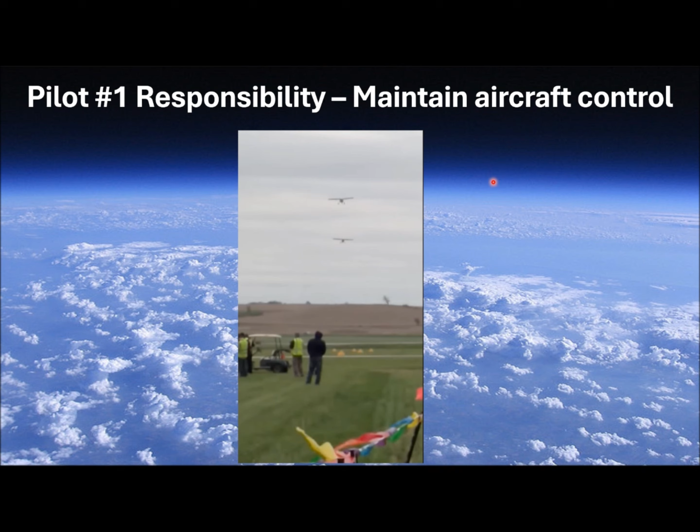What I'm going to discuss today is first give you some information about loss of control, which is by far the biggest cause of accidents and fatal accidents, not only in general aviation, but even in commercial aviation. Then talk about angle of attack, review what it is, and then talk more specifically about why it's important and better than airspeed to control flight in certain conditions.

Then talk about what kind of angle of attack systems are out there and how that information is displayed. And then the last half of the talk will be a bunch of short video clips that show angle of attack being used in the cockpit for a variety of flight situations.

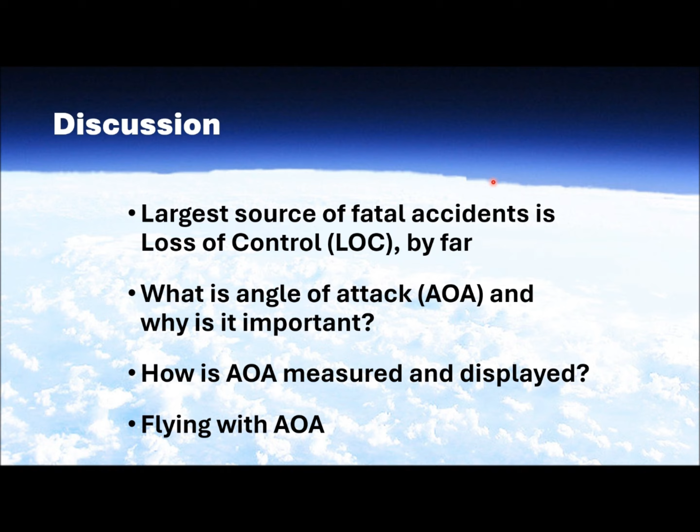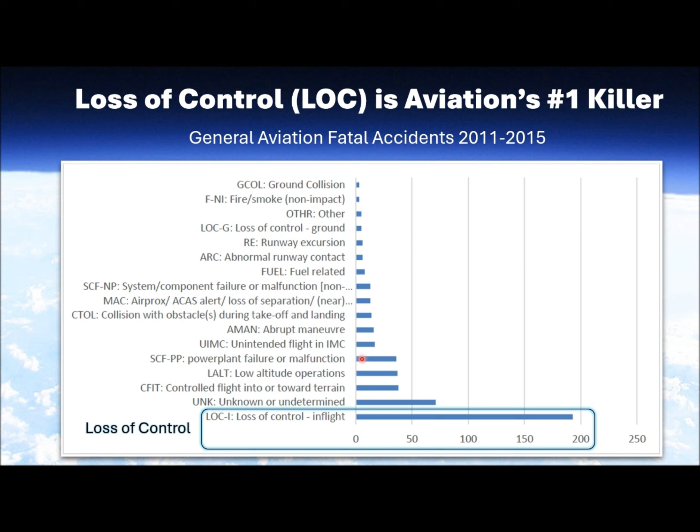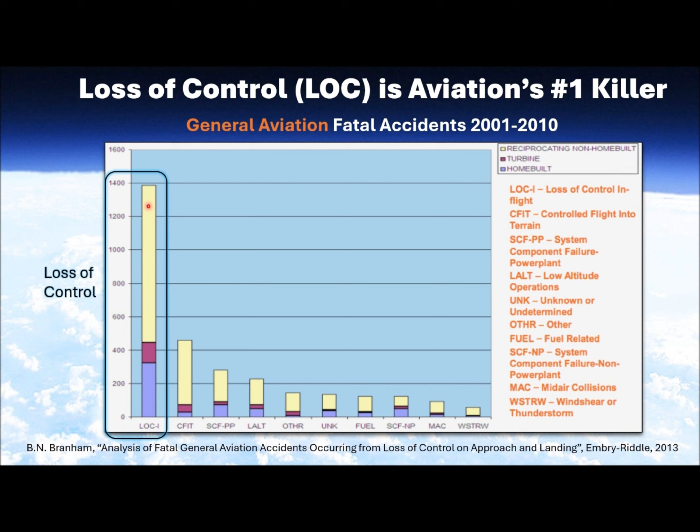Now here the plot is shown horizontally. The next plot shows similar data from a different source, plotted vertically instead of horizontally. There's a little bit more information. The yellow represents certified aircraft, the blue represents experimental aircraft, and the purple actually represents turbine aircraft. But the trend is the same: LOCI, loss of control, is by far the largest single reason for general aviation fatal accidents.

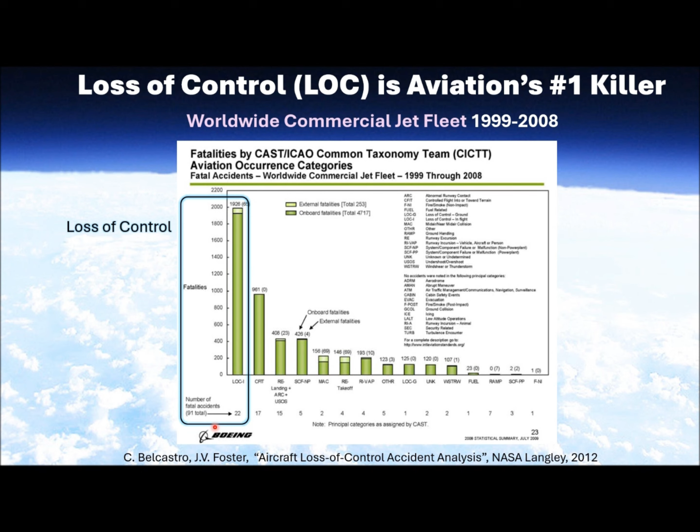Now, because loss of control is essentially a pilot issue, you would think that the more experience a pilot or an aircrew has, the less likely they are to experience loss of control accidents. Well, if you thought that, as I did, you'd be wrong. This is data for the worldwide commercial jet fleet over a 10-year period, and guess what? Loss of control, those trends in terms of causes of accidents, even for highly experienced flight crew, is pretty much the same as what it is for general aviation aircraft.

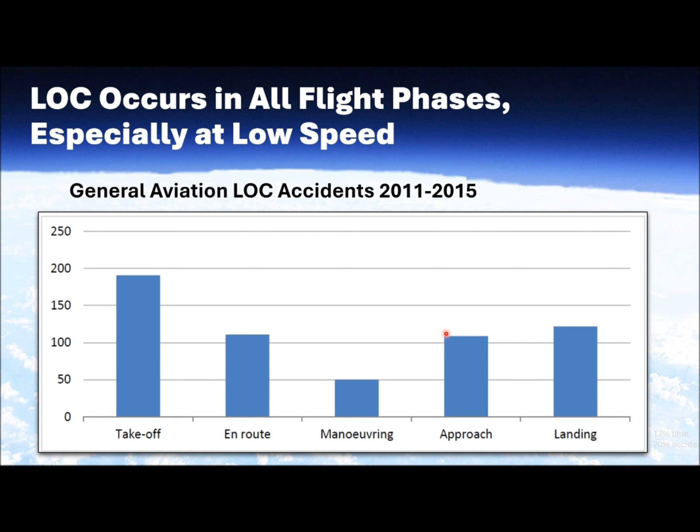If you look at where loss of control occurs in terms of the phases of flight, it occurs across the board, even en route, where you might not expect it to occur. It's a little surprising to me that it's a little bit higher on takeoff than it is on landing, although you can consider approach and landing together to be more common. But the point is, it happens across the board in the flight conditions that we encounter.

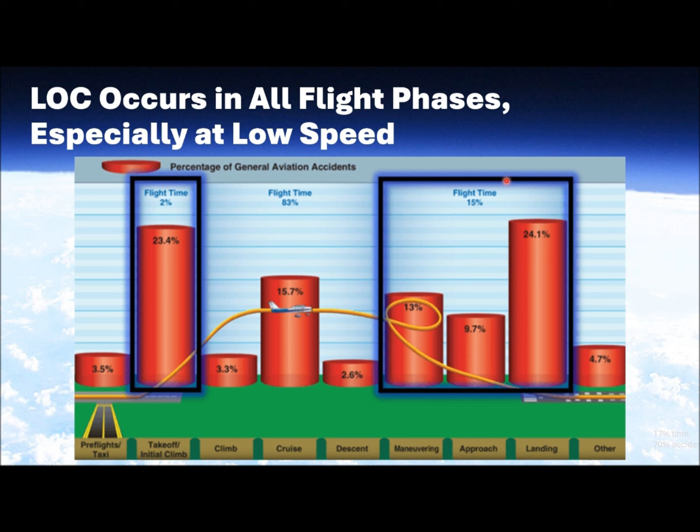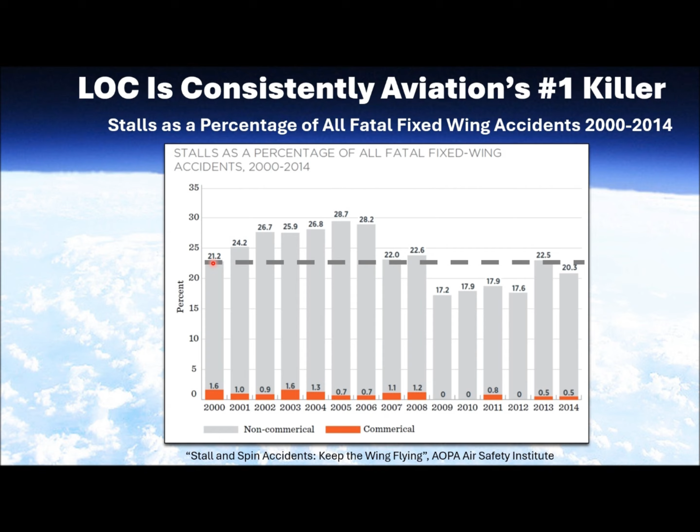Now, angle of attack became an issue for the Navy about 70 years ago, right after World War II, when they were switching from propeller operations to jet operations off carriers. They noticed a very, very high accident rate, much higher than with propellers, and there's a bunch of reasons for that.

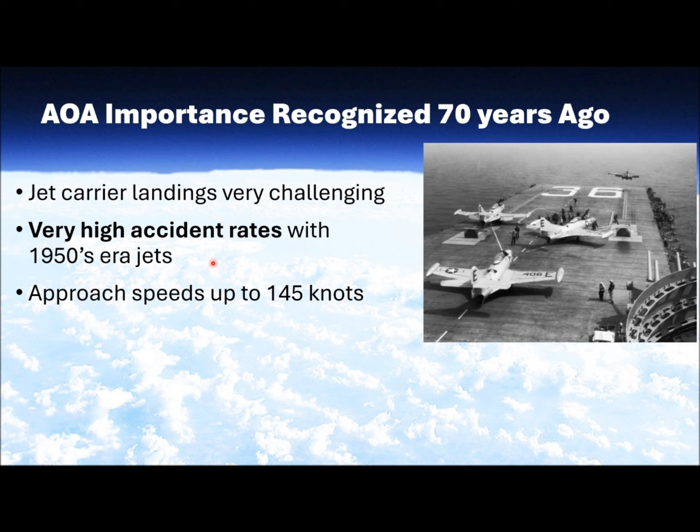One reason is that these jets approached at much higher airspeeds, still approaching on the same small carrier deck. An F-4 Phantom has an approach speed of 145 knots. Carrier landings are incredibly challenging. You're looking at a runway that's only 700 feet long, and that's deceptive because the arresting wires you have to hit—there are 4 of them—are spread over only the first 160 feet of that runway. So if you can't nail the aircraft within 160 feet, you're either going around or going into the water.

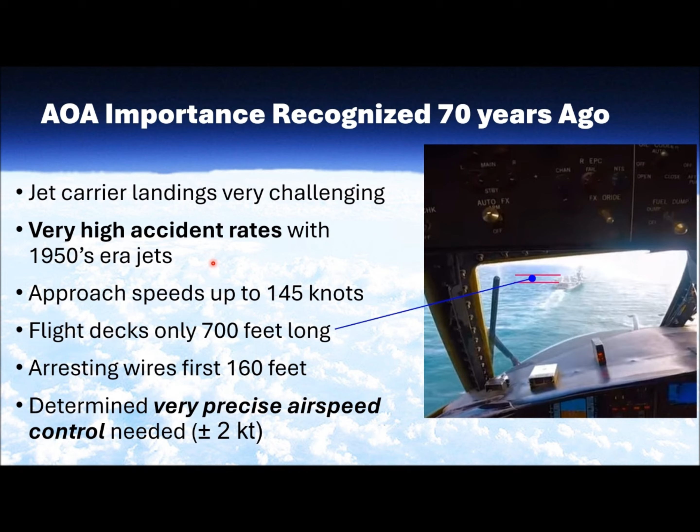What the Navy found, after studying this a lot, was that to do a successful landing, you had to maintain a very precise airspeed on approach—plus or minus 2 knots—which is not easy to do. So they determined that angle of attack made a much better flight metric to control the approach and result in a successful landing.

As a result, the Navy was able to reduce their carrier landing accident rate by about 50%. And not only the Navy, but for about the past 70 years, both the Navy and the Air Force have trained their pilots to operate aircraft in the approach phase using on speed. Unfortunately, general aviation has not followed suit, for several reasons.

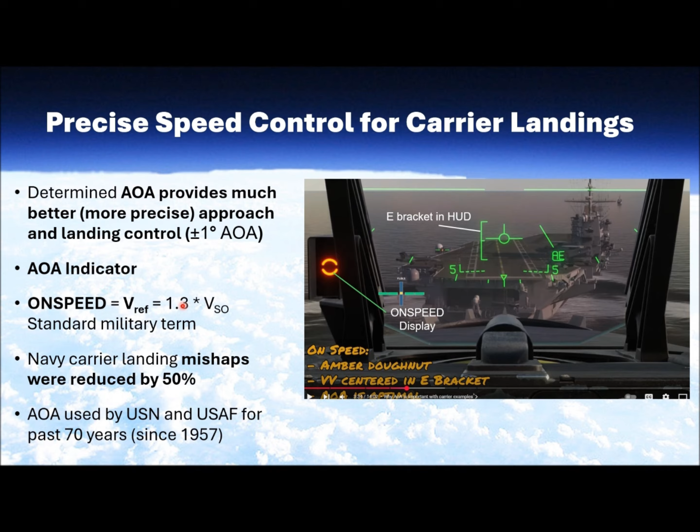So let's review what angle of attack really means. Angle of attack is simply the difference between the reference line of the aircraft, or the wing, and the direction of flight of the aircraft. There's a famous book called Stick and Rudder by Wolfgang Langewiesche, and the way they describe it, it's the difference between where the aircraft is headed and where the airplane is actually going. That relatively small angle is called the angle of attack.

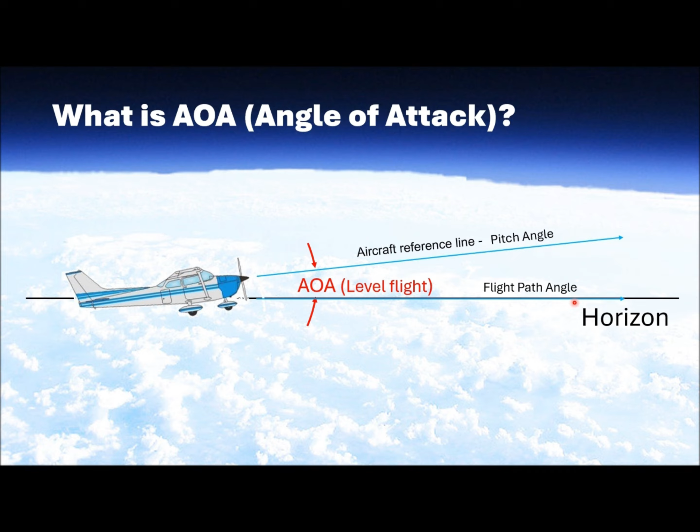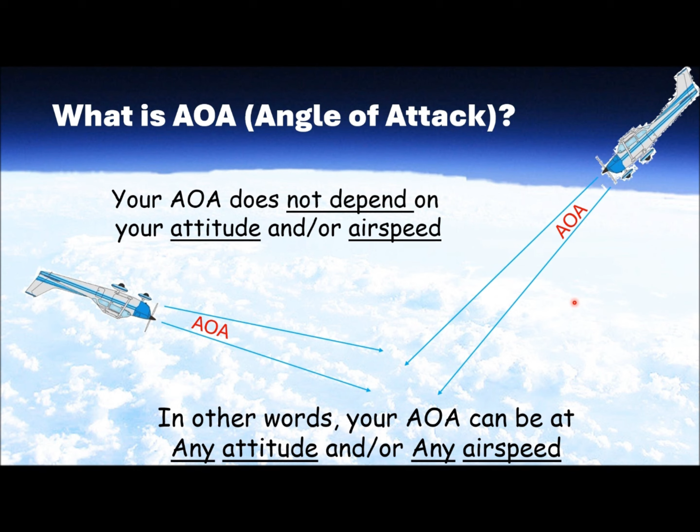However, you can fly a specific angle of attack at any airspeed and any attitude, as you can see by these illustrations. You can be at red line and still be at a low angle of attack or a high angle of attack—it doesn't matter. What matters to the wing, and the only thing that matters to the wing for a fixed set of flight conditions, is what angle it is to the relative wind. Why is that important? Because the wing only knows what that angle is in terms of its ability to generate lift.

Most airfoils only have about a 20-degree range in which they generate lift. So it turns out that if you have an angle of attack indicator that allows you to fly a specific angle of attack, you're much better able to hold the conditions you want for specific ranges or phases of flight.

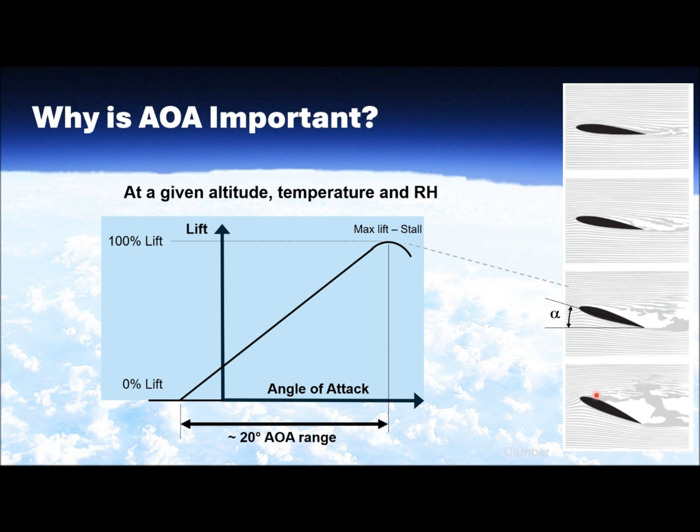If you go beyond the stall, the airflow over the top surface of the wing starts to separate from the wing, starting at the back, and then as the angle of attack increases, that separation point moves forward along the wing. But the key is, once you hit stall or even go beyond stall, the behavior of the wing is very much different than it was designed to be, and you lose control of the airplane until you get the airflow going over the wing properly.

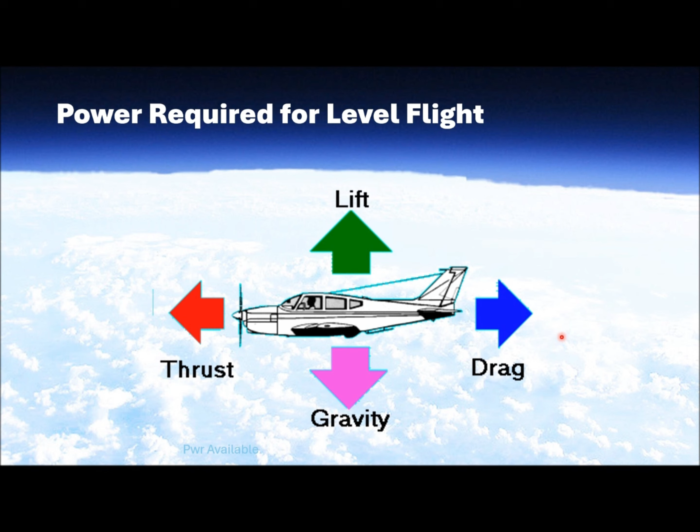Now, this is a figure that many of you might recognize from your pilot training days, and what it says basically is there are 4 forces acting on an aircraft: 2 in the vertical plane, lift and gravity, and 2 in the horizontal plane. When the aircraft is in steady state flight, it could be cruise, and the net result of all of those forces is 0 force. If you have 0 force, you have 0 acceleration. If you have 0 acceleration, it means you're in a steady state condition - you're not changing your speed either vertically or horizontally. But for our purposes, I'm only focusing on the thrust and the drag.

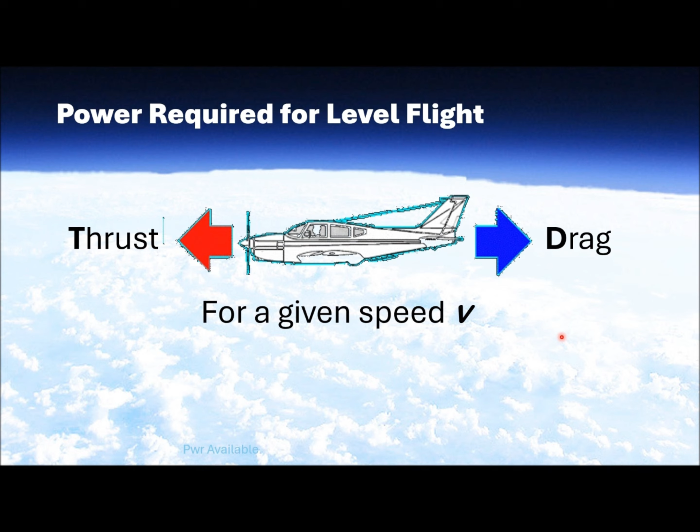If you're at any specific airspeed, and you're in steady state conditions, whether it's a low airspeed or a high airspeed, the thrust and drag are equal, because that means there's no net force, you're not accelerating. If you take the thrust and multiply it by that velocity, that gives you the amount of power that's available, being generated by the propeller. If you take the drag and multiply it by velocity, that tells you how much power is needed to maintain that state of flight.

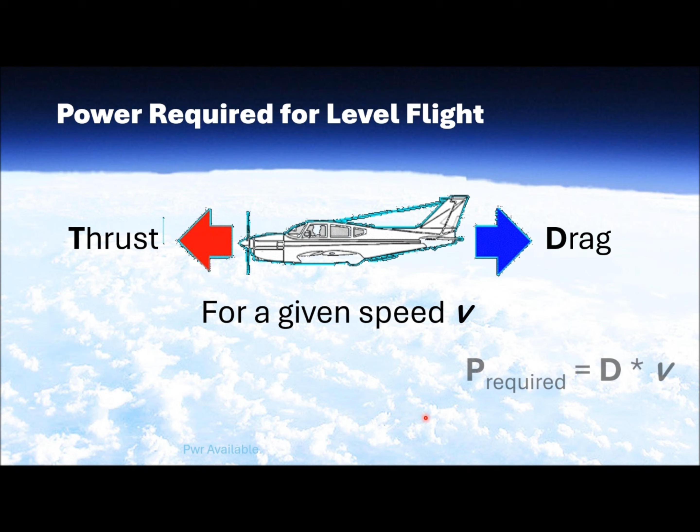I'm going to focus on the power required because that tells us a lot of important information. So what I've done is calculate the power required curve for a Cherokee 180, the 1973 model that we have at Yale Aviation, 044. That airplane has a very specific airfoil.

All the calculations are done for a standard atmosphere at sea level, so 29.92 inches of mercury, 59 degrees Fahrenheit. Those calculations are performed for the aircraft at max gross weight, which is 2,450 pounds, achieved with 3 passengers, full fuel of 50 gallons, and some bags. There's some implicit assumptions worth pointing out - one is that all of these calculations assume the airplane is flying at 1G, which is our normal cruise operation. These values come from the Pilot's Operating Handbook, or POH, so the numbers you see here are what are in the POH.

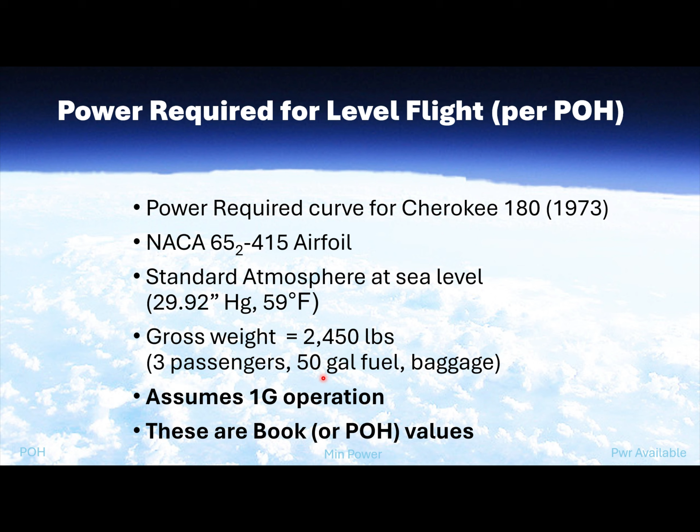So what does that curve look like? Well, the power required curve is the dark curve I'm showing here. It's important to note this is for the aircraft with the flaps up, or in the clean condition. The stall speed for the airplane with flaps up is 68 miles an hour. If we put the flaps down, our stall speed decreases to 61 miles an hour, and this is where that point lies on the power required curve.

Now, I'm also showing you the power that's being generated at the propeller when the engine is at 100% power, 2,700 RPM. You can see that the two curves cross - the power required is equal to the power available for the 100% power condition out here at 148 miles an hour, and that is what the POH says is the maximum speed of the airplane.

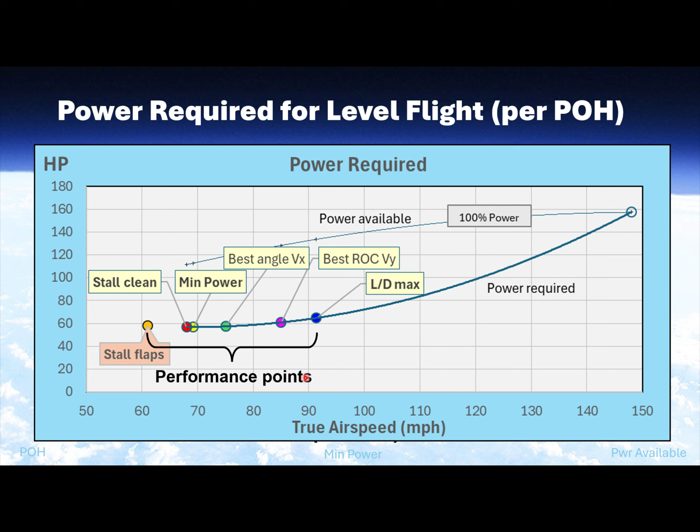Now you'll notice I have a bunch of conditions noted here, so let me explain why those are important to keep track of. We call those key performance points, because each one represents a flight condition that at different points in time we may wish to fly, and it's useful to fly. Obviously, there's the stall speed - that's important because if we hit stall or go beyond stall, we lose control of the airplane, at least until we can recover.

And if we're low enough, we can't recover.

Let's say we're a Civil Air Patrol mission doing a search and rescue over a given area. We want to maximize how much time we spend over this area. We have a finite amount of fuel on board, and we want that fuel to last as long as possible—maximum endurance. So we want to fly at the speed for minimum power, because power is the rate of use of energy, and with a fixed amount of fuel and minimum power, that gives us the maximum time that fuel will last.

If we are taking off and are worried about obstacles at the end of the runway, then we want to fly at the maximum angle of climb, which is called VX. So we want to fly at that speed that gives us the maximum angle of climb.

On the other hand, it's more common when we're on a cross-country, for example, that we want to get to cruise altitude as quickly as possible. In that case, we want to fly at the speed at which we get the maximum rate of climb, which is called VY.

Now, if we want to fly as far as possible, we want the aircraft to be operating at its most efficient point. The airplane is most efficient when the ratio of lift to drag is the highest, or maximum. So if we want to fly maximum range, we want to fly at max L over D.

Now, if we have power and we're cruising, that means we'll fly as far as possible on the fuel that we have. If for some reason we lose power, now we're a glider, and we still want to fly for the maximum range given the altitude that we have. So we want to fly at maximum L over D in an engine-out scenario when we're looking for a landing area.

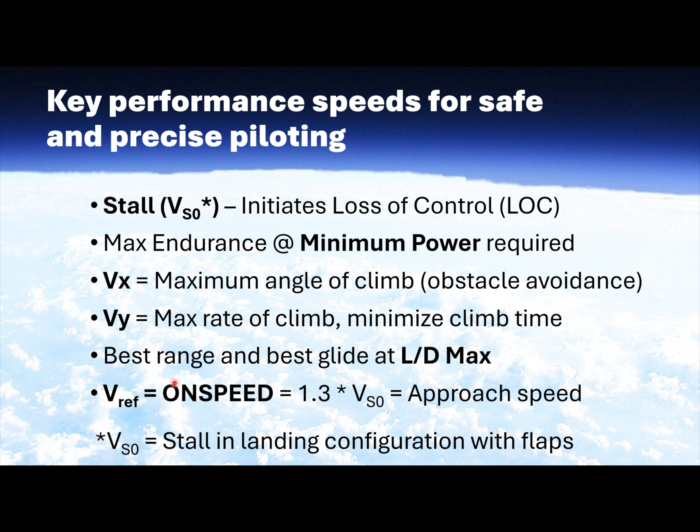And then there's one other speed I mentioned briefly before, called on-speed or VREF. That's a very simple calculated speed—you take the stall speed, typically in the landing configuration, and multiply it by 1.3, and the resulting number is called VREF, also called on-speed. That's a very important speed, and it also corresponds to a very specific angle of attack, which we'll talk more about.

You'll notice that for the Cherokee, the speed range we operate at is from about 60 to 150, so we have a 90-mile-an-hour range in which the aircraft generally will fly. But these key performance points occupy only about the lower one-third of that operating range.

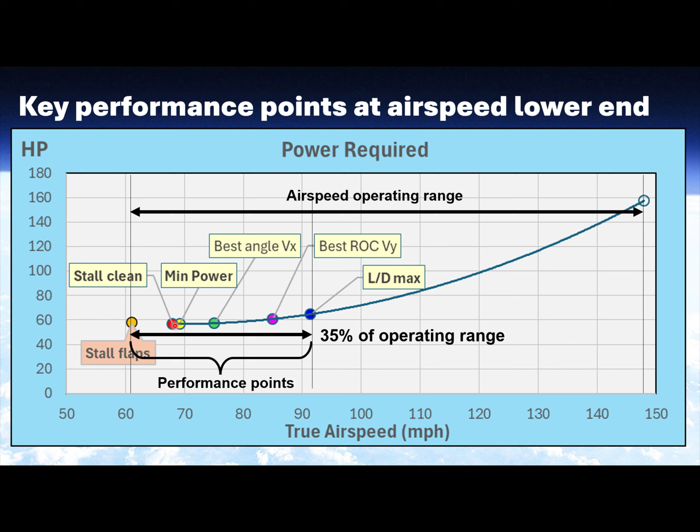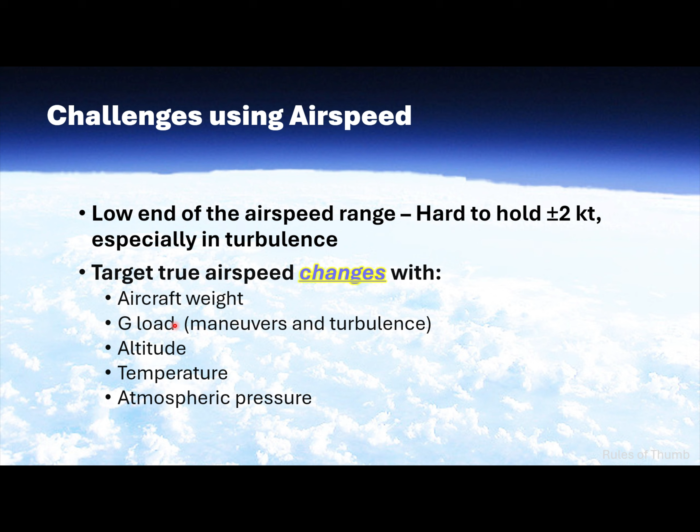In fact, there's very little separation between some of these points, like between minimum power and stall in the clean configuration. That makes it more difficult to fly at these specific conditions because these key points are bunched up in the airspeed range. So it's difficult to hold a very specific airspeed within a knot or two using the airspeed indicator, especially if there's turbulence.

The other thing that happens is that the target airspeeds we want to fly at change with all of these conditions. These conditions change not only day to day for a particular flight, but even within a flight—we're flying the airplane at different weights at the beginning and end of a flight. We experience G loads from both maneuvers and turbulence that we can't predict, but they affect how the airplane performs. And obviously, we're flying at different altitudes, temperatures, and pressures.

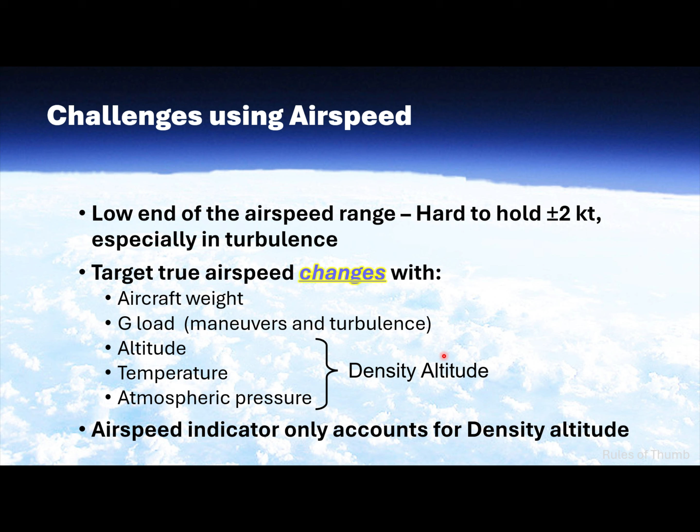Again, within a flight or day to day, these things, all kind of rolled up into density altitude, will change. And that means the airspeeds we want to fly at for these specific conditions will also change accordingly. Now, the good news is that density altitude effects are actually already accounted for in the airspeed indicator, so we have to worry less about that.

So our airspeed indicator—we don't fly using true airspeed. We fly based on what the airspeed indicator says, and it tells us indicated airspeed, not true airspeed. It turns out the airspeed indicator is essentially a pressure gauge. It measures the dynamic pressure from the pitot tube and converts that into speed or velocity, but it's calibrated so that it's accurate only for a standard atmosphere.

But it does not account for two things that are very important: it does not account for the weight the airplane is operating at, and it does not account for the G loads we're experiencing during flight.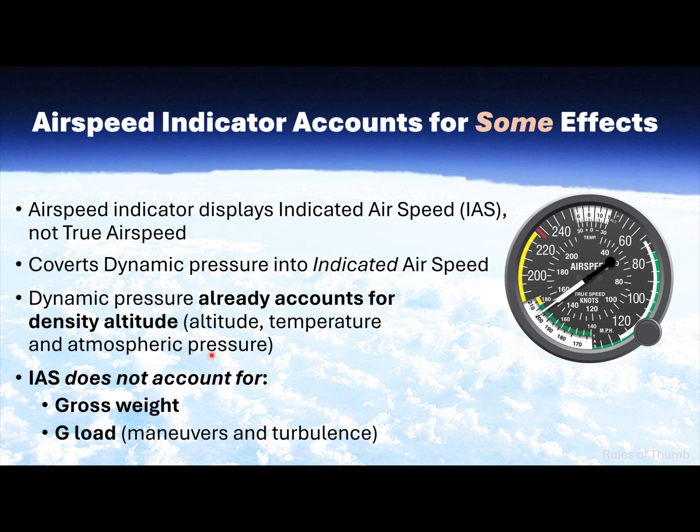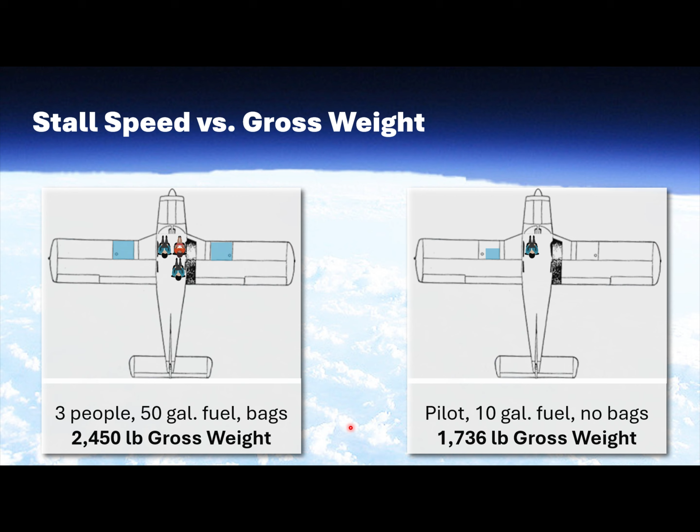If we're at max gross weight, our stall speed with flaps is 61 miles an hour, true airspeed. However, if we're much lighter, 1 person and 10 gallons of fuel, our stall speed actually drops to 51 miles an hour. So that stall speed is 16% less than at max gross weight, and these are not the numbers in the POH. In fact, you will not find in the POH how to calculate that. There are rules of thumb to do it. It's not that complicated, but it's not in the POH, and I'd postulate that many pilots don't make those kinds of adjustments to their target airspeeds based on weight.

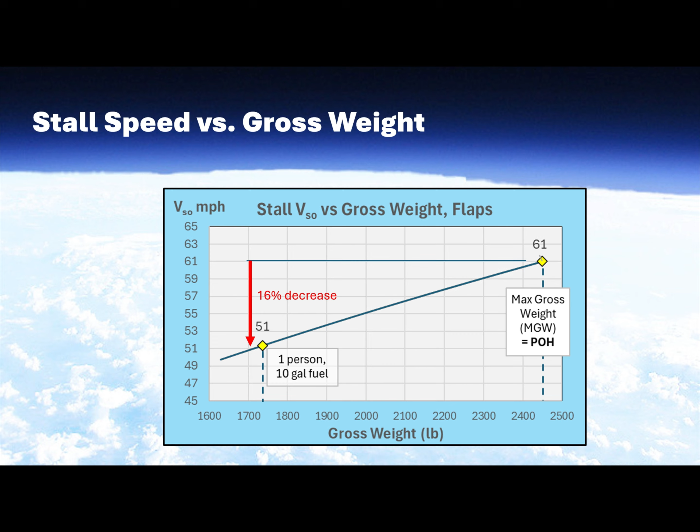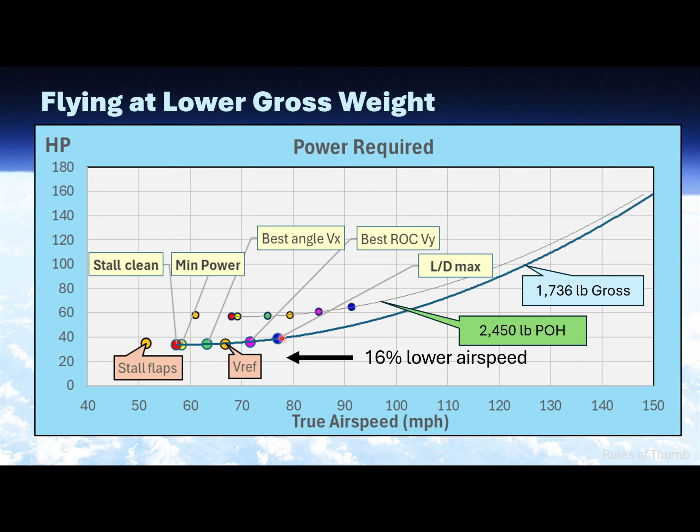Now, what that tells us is if we fly the way our actual conditions dictate, the stall speed is 51, VREF is 1.3 times that, or 67 miles an hour for this weight. However, let's say we don't know that, or can't figure it out, or don't think it's important, and instead we say, let's fly it by the book. The book says the stall speed is 61, 1.3 times that says VREF is 79 miles an hour. So suppose we fly the approach by the book instead of what we really should be flying.

What's the consequence of that? Well, now we're flying about 20% faster than we should be, and the kinetic energy we're carrying goes like the speed squared. So if we're flying 20% faster than we should, that means we have more than 40% extra energy than we really need. The only way we can dissipate that energy once we touch down is through the brakes. They convert kinetic energy into heat, and they have a finite, limited ability to do that. So it will take us substantially longer to stop if we're carrying that much extra energy.

Now, if we're flying out of New Haven that has a 5,600-foot runway, that's not a problem. But try this at an 1,800-foot runway, and you very well may have one.

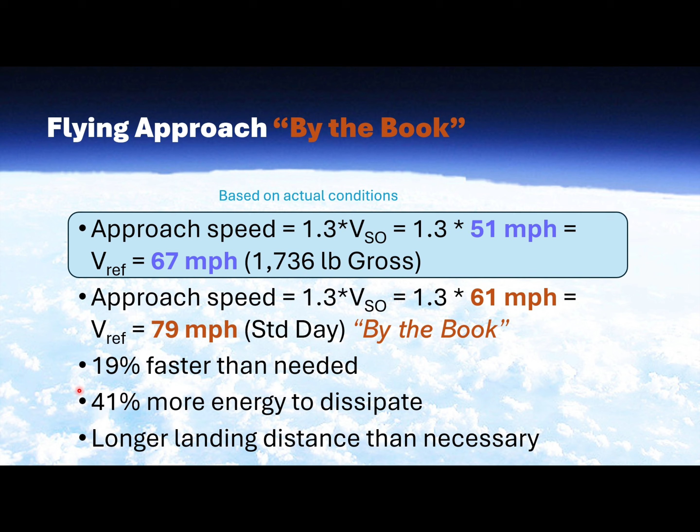Now, in addition to the absolute weight of the aircraft, we also experience G loads from two sources, one of which is maneuvering.

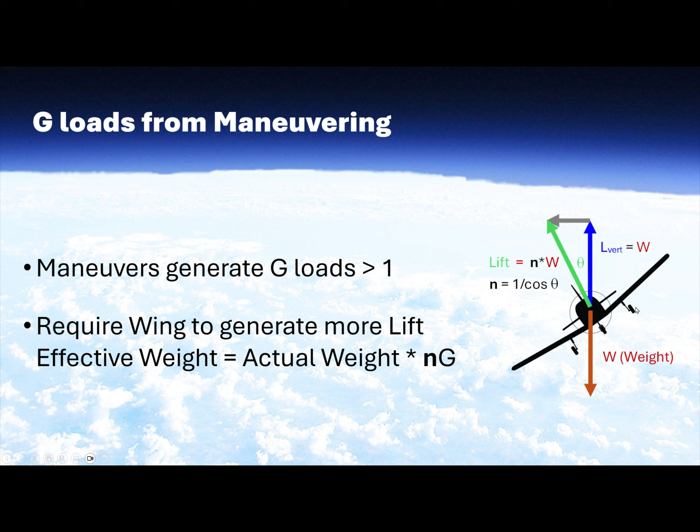For example, if we're engaged in a 45-degree bank, we will be pulling 1.41 G's. Now what's the significance of that? Well, the wing doesn't know whether the lift it has to produce comes from the absolute weight of the aircraft or the G loads, but if we're flying 1.4 G's, the wing has to generate that much more lift.

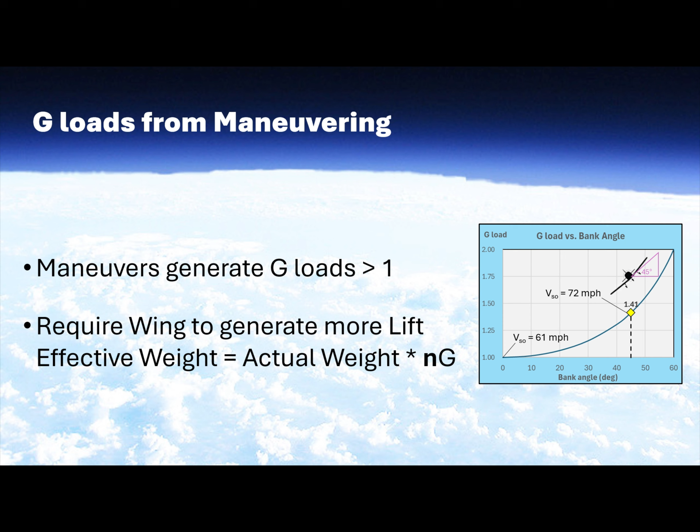So if we're flying at zero bank angle, or 1 G, our flap stall speed is 61 miles an hour. If, on the other hand, we're pulling 1.4 G's in a 45-degree bank angle, our stall speed increases to 72 miles an hour. Now let's say we're flying straight and level at 68 miles an hour—not much of a margin over stall, but at least we're over stall, not stalled. If we suddenly go into a 45-degree bank and pull 1.4 G's, we will stall. In a few minutes, I'll show you a video clip of exactly that scenario, where the pilot did an accelerated stall at only 1.2 G's—pretty dramatic.

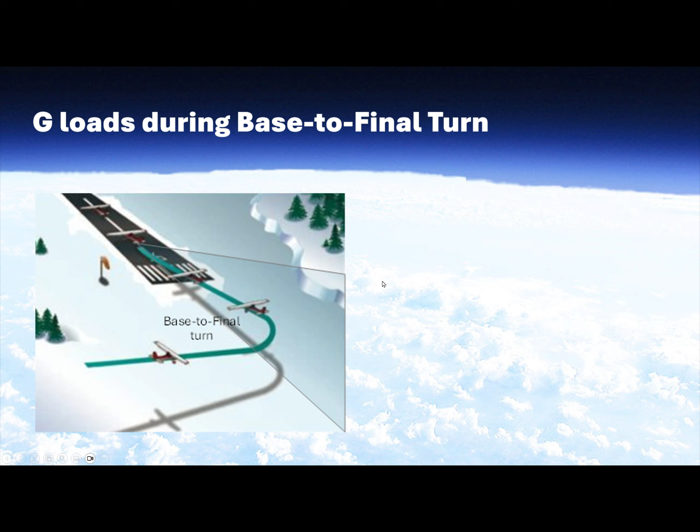Where that often happens is in that base-to-final turn. This is a well-known area where loss of control accidents occur, somewhat like we saw in the initial video. If we're flying a left-hand pattern doing a standard base-to-final turn, the shaded area represents the extended runway centerline. With a direct headwind, that's pretty easy to handle. But if we're flying a left-hand pattern with a crosswind from the left, it's quite easy to misjudge that turn. If we get blown past the runway centerline, we have no choice but to increase our bank angle in order to turn back and get on centerline.

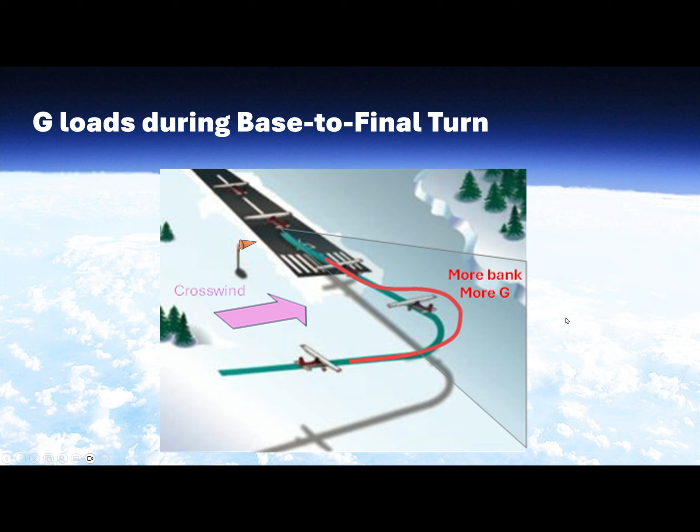When we increase the bank, we increase our G loads. And if we're close to stall speed, if we're not careful, we can stall. Unfortunately, that's a pretty common accident scenario.

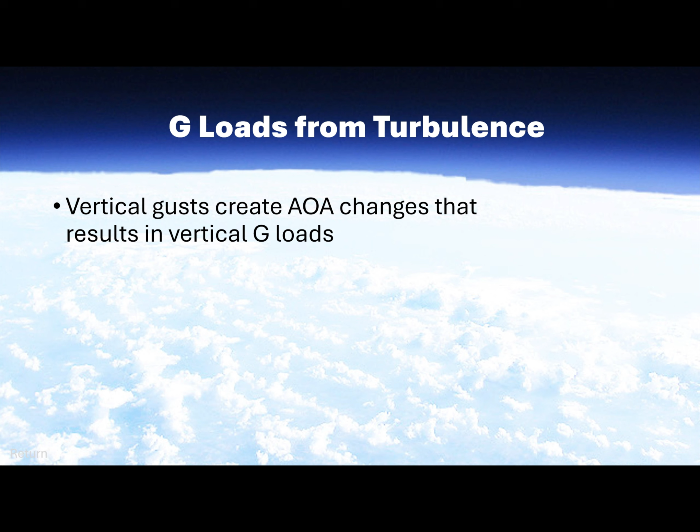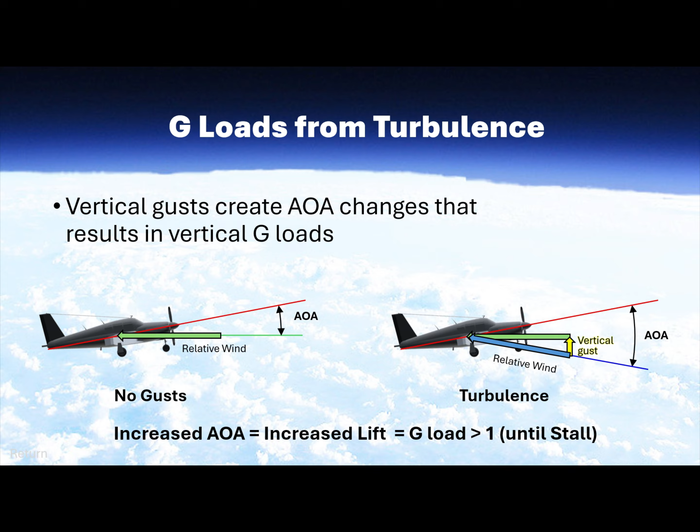When we increase the angle of attack, we increase the lift generated by the wing, and as long as we're below stall, we'll essentially feel an additional G-force. Those are basically the G's we feel during turbulence—these vertical G's. In fact, even in what's defined as light turbulence, the variable vertical component of G can be up to half a G. Our normal condition is 1 G, so if you superimpose plus or minus half a G, we can be pulling 1.5 G's just due to turbulence.

And obviously, turbulence is not predictable. With more significant turbulence, we can actually pull up to 2 G's. So we get G's both from maneuvering and from turbulence.

Now, recently, Laura and I were flying. I was taking some dual from Laura. And...

We did have full fuel, a few bags, so we were below gross weight. And if you do the calculations, that says our 1 G stall speed with flaps up is 64 miles an hour.

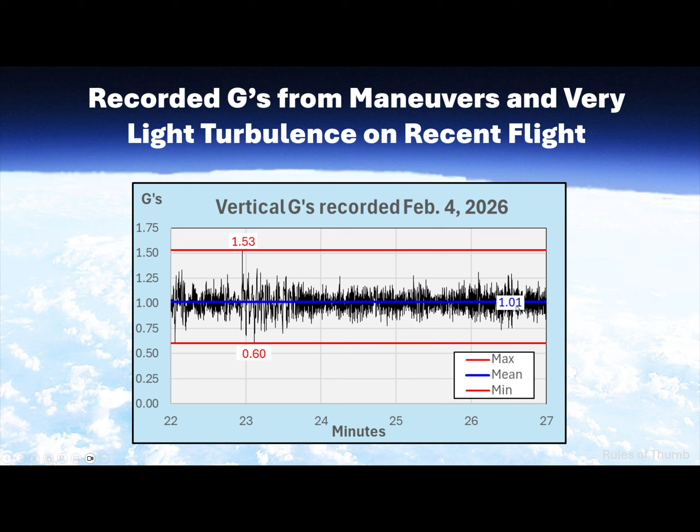So this is kind of normal in flying. Our average, as you might expect, was just about 1 G. But since we know the Gs, we can convert that into the equivalent stall speed at that instant in time, which is what I've done here.

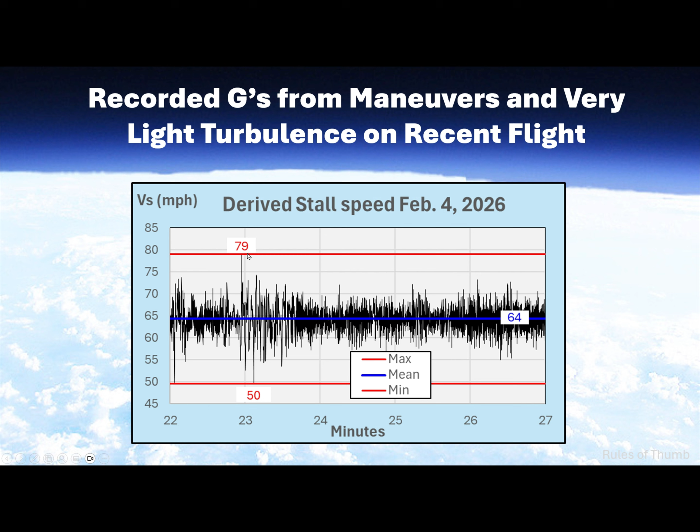And this is what the stall speed looks like during that 5-minute segment of flight. So even though our mean stall speed at 1 G is 64 miles an hour, during this period of flying we actually had a stall speed as low as 50 miles an hour or as high as 79 miles an hour. So the G loads and the aircraft weight have a big influence on our stalling behavior.

So let's review what we've talked about so far. First of all, the airspeed indicator already compensates for density altitude. That's a good thing. But what it does not account for is the actual weight of the aircraft, the G's from maneuvering - we can calculate those and use rules of thumb, although many people don't - but also the G's from turbulence, and there's no way you know what the turbulence is going to be. You know if it's light or whatever, but you don't know what gust will hit you and when.

So what we really want is a single instrument that tells us where we are with respect to the ability of the wing to generate lift. And in fact, that is exactly what an angle of attack indicator does.

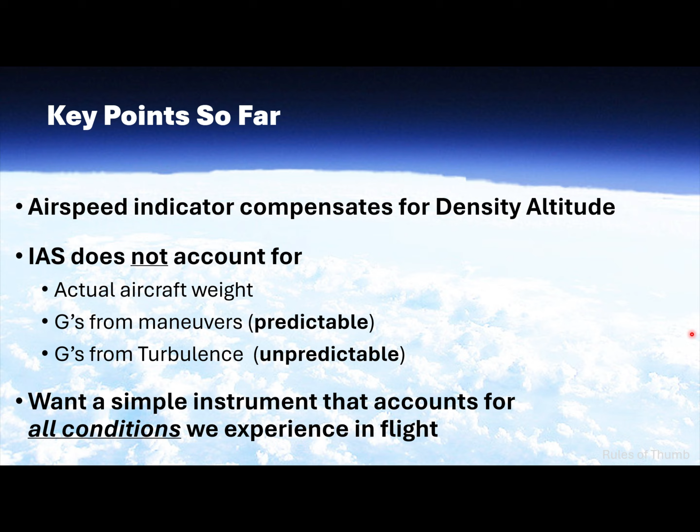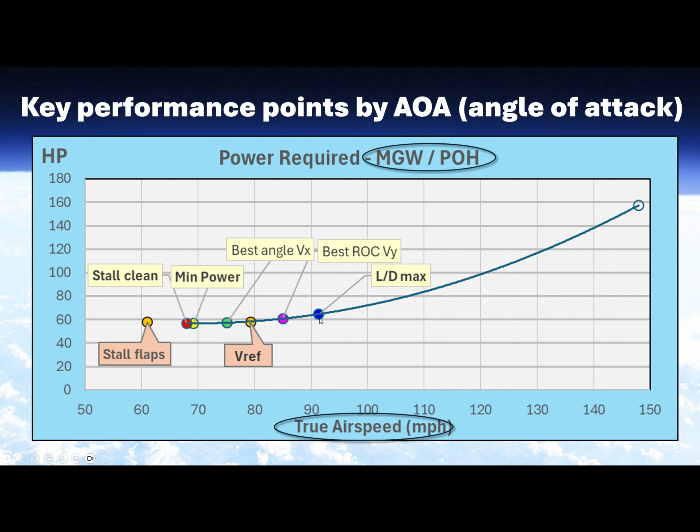This curve, as we've said, will change as the airplane weight changes and the G loads change. But if we look at those angles of attack and plot those, this is what the power required curve looks like as a function of the angle of attack.

So a couple of things worth noting. First, the wing is operating, in this case, over about an 18-degree operating range of angle of attack. But if you look at these key performance points that we're interested in, they occupy about 77% of the range, and they are much better separated in the angle of attack regime than they are in the airspeed regime. So if we have an accurate angle of attack indicator, it's easier to hold these specific flight conditions using angle of attack than it is using airspeed.

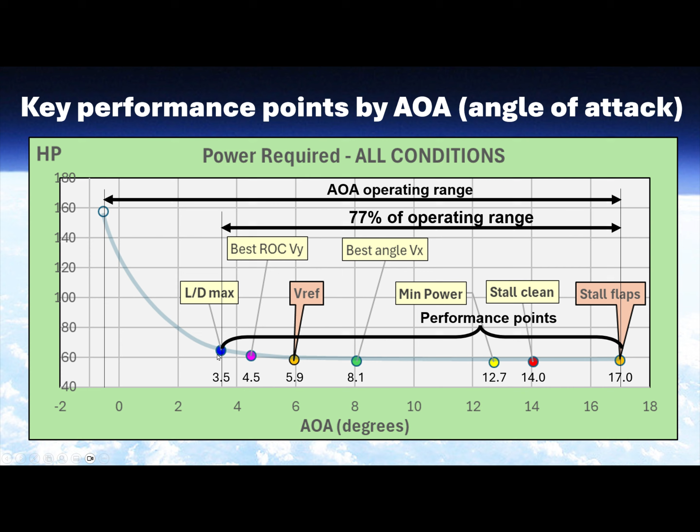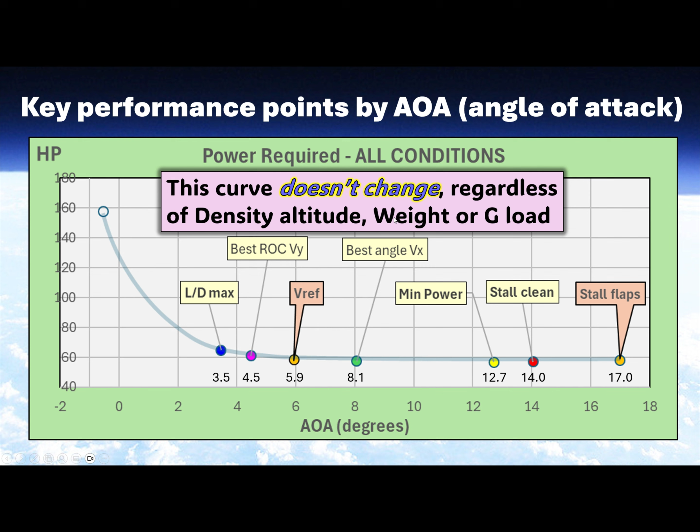But that's one thing, it's easier to hold. The more important thing is that this curve, unlike the airspeed curve, never changes. Doesn't matter what the airplane weighs, doesn't matter how many G's you're pulling, the airplane with flaps will always stall at 17 degrees angle of attack, regardless of the weight or the G forces.

If we want to fly max L over D, that occurs at 3.5 degrees angle of attack, regardless of these other conditions. That's the true beauty of the angle of attack indicator - the angle of attack for these conditions is the same for all conditions, and as we've said, those conditions change continuously. So it makes it much simpler for us to operate where we want by looking at one instrument that is not affected by those factors. And as I mentioned, we can hold those conditions better with angle of attack than we can with airspeed.

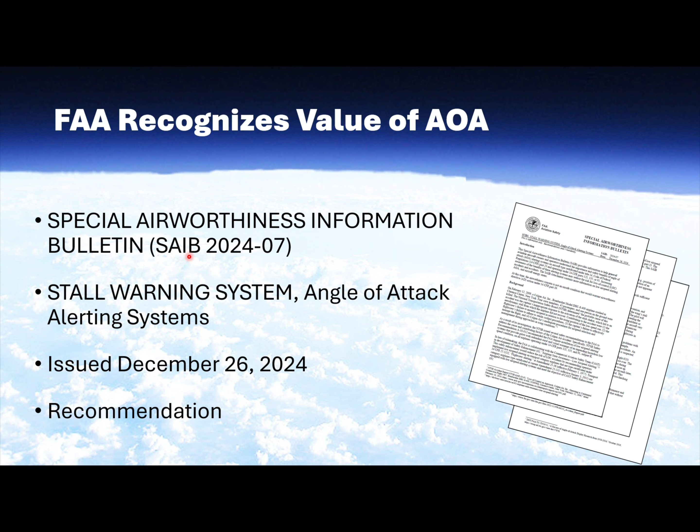Now, the FAA recognizes the value of angle of attack. A little over a year ago, they came out with what they call an SAIB, a Special Airworthiness Information Bulletin, that addresses angle of attack indicators. And I'll let you read what they had to recommend.

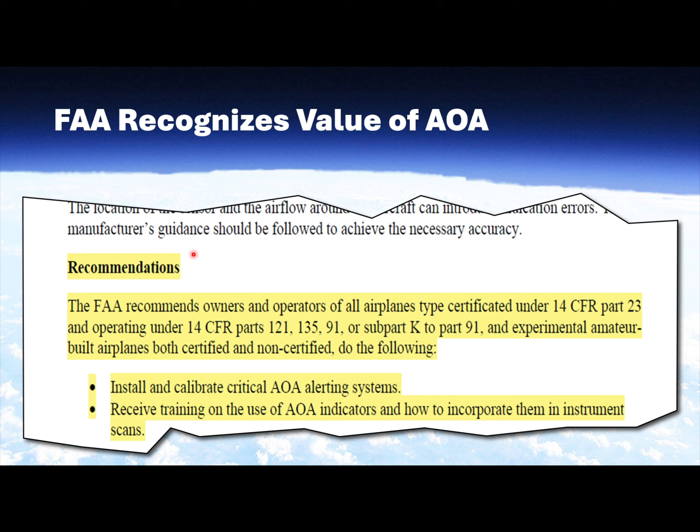So what the FAA is recommending is that all operators of aircraft install, train on, and use an angle of attack system. Now, this is a recommendation only, it's not a requirement. But the fact that they put this in writing and define it as their official policy is done for a reason. They're trying to enhance aviation safety because they believe angle of attack is a better way to control the airplane in certain scenarios.

Now, at this point, you may be saying to yourself, Dave, you've made the case that angle of attack could be helpful in our flying, but what are we supposed to do? We don't have an angle of attack indicator in our aircraft, and of course that's true. However, today there are 6 or 7 companies that offer affordable, accurate angle of attack systems that can be put into the airplane.

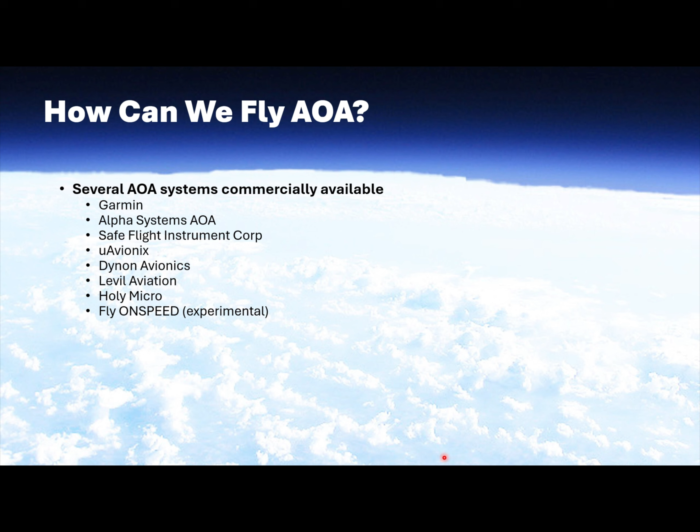The way the FAA wants to see these things used is as supplemental sensors only. And what that means is they can't tie into anything on the airplane that was part of the aircraft certification. So, for example, you can't take a tap off the pitot tube in order to feed your AOA system. It has to be independent.

Once you decide you want to put one of these in your airplane, the FAA considers it a minor alteration, which means you only need to create a logbook entry to document that the aircraft has changed. If it were a major alteration, you'd have to fill out a 337. So that's not required in order to retrofit an AOA system into your aircraft.

The FAA defined two memos that define what they believe a good AOA system has to comply with. The first one is specific to angle of attack. That memo has since been broadened, and the earlier memo was superseded. The current memo that defines this is referred to as NORSEE, which is non-required safety enhancing equipment. So this memo is the FAA statement that says if you want to install something that enhances safety, here's what we think you need to do in order for us to bless it.

So an AOA system manufacturer, like one of these companies, submits a documentation package to the Chicago certification authorities. They have responsibility for NORSEE equipment. And the FAA, if they believe the equipment complies with what they think it needs to comply with, will issue them a letter saying, we believe your system meets the requirements of the NORSEE memo. Any one of these companies will publish those letters on their website. It's somewhat similar to an STC, but it's not an STC. We can go into that later if anybody is interested.

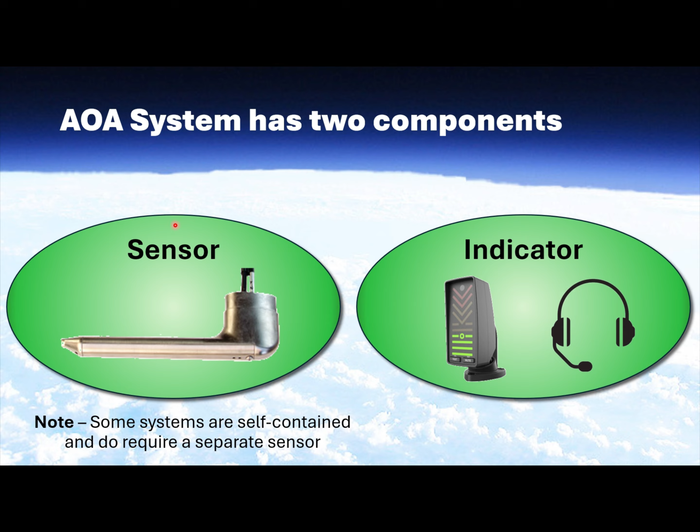An AOA system has two components. It's got the sensor, where the raw data used to calculate angle of attack is acquired, and then it's got a way of presenting what the AOA is to the pilot, and there's several ways to do that.

If we start by looking purely at the sensor, most of them use a device that looks like a regular pitot tube, and it has a dynamic pressure port in the front of the pitot tube, but it also has a second pressure port, typically on an angled surface. Often the angle is 45 degrees. And it turns out that if you take the dynamic pressure, the pressure from the angled surface, and the static pressure, which can be derived from either a port on the probe or elsewhere, the ratio of those three sensors can be used to very accurately determine what the angle of attack is.

There are other systems out there. A company called Safe Flight, which has been around for a long time, has a sensor that looks very similar to what we're already familiar with, which is a stall warning switch on the leading edge of the aircraft, and it has a tab like our switch, and that tab moves with the stagnation point of the airflow of the wing, and that stagnation point will move with different angles of attack.

The switch that we have is a binary device. It's either on or off. It's obviously set to go off 5 knots above the stall speed. But the difference is that this is not a binary switch. This is an analog switch, or an analog device.

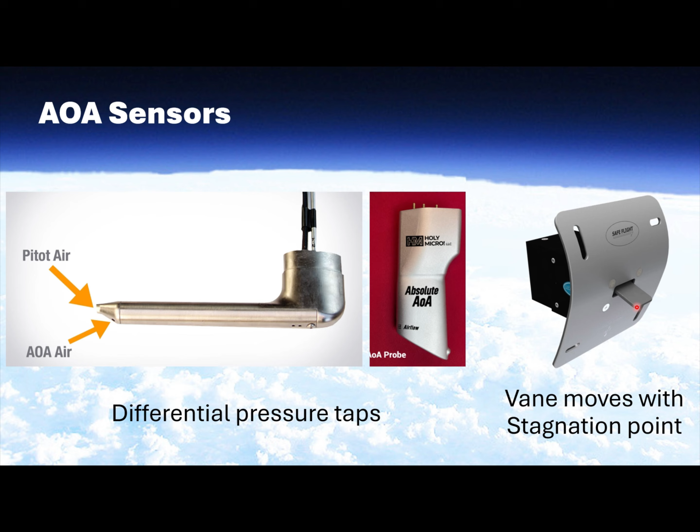And so whatever position this vane has determines exactly what the angle of attack is, and that information is fed back to the indicator. If you look at the displays or indicators, how does the pilot know what the angle of attack is? That varies as well.

There are two groups of sensor displays. There are visual displays. Here you see a standalone display. This particular one happens to come from Garmin. Or that information can be displayed on an EFIS screen, as you see here, where the yellow arrow is pointing. This particular EFIS screen is from Dynon. Garmin has a G3X EFIS screen, and the AOA system from Garmin will integrate with the G3X. So that's one way AOA can be displayed to the pilot.

But the other way is that you can get audio feedback, and there are certain benefits from doing that. First of all, it turns out your brain takes much longer to process visual information and understand what it means than it does to process audio information. It takes about 3 times as long. So that's one benefit of audio feedback.

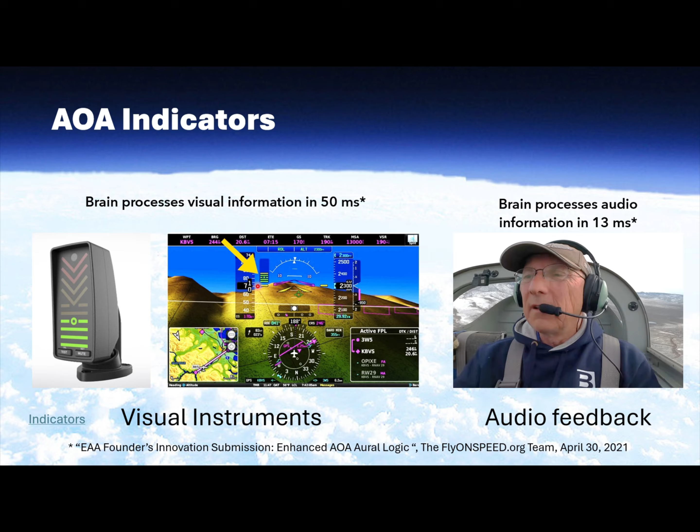But the more important benefit is that if you're relying on audio feedback, you don't have to increase your instrument scan to include another thing to look at. Since most loss of control situations occur at low speed in the approach and landing, you want your eyes outside the cockpit, and relying on audio for angle of attack is a nice way to do it. So in the rest of this presentation, I'm going to focus on the audio, although you'll also see some of the visual indicators in the video clips I'm going to show you.

So let's start by simply hearing what the audio indication sounds like. In this particular video, there'll be some text that appears on the screen as the audio signals change, indicating what's going on.

So that was what it sounds like.

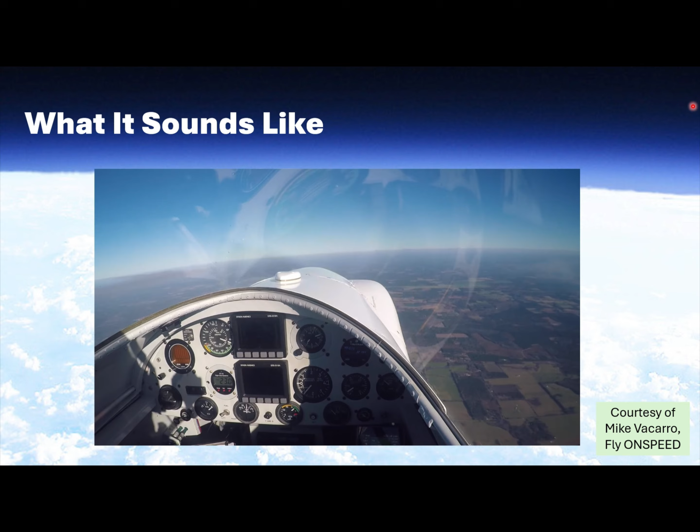In this video, you're going to hear the narration of the pilot. The pilot is Mike Vacarro. Mike is the president of Fly On Speed, a volunteer nonprofit organization I'll talk more about at the very end. He's going to narrate what the tones are and what they mean. But in addition, you'll also see on the lower right-hand side an inset of what the visual indicator is showing, and I want you to pay attention to the symbology in the center of that display.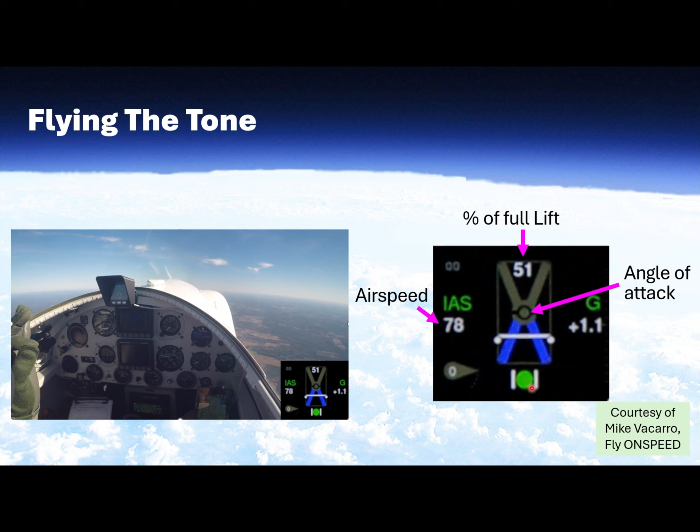There's a lot of information being presented here, but the symbology is what tells you what the angle of attack is. To describe that, let me show you this curve. What we're doing here is showing you what happens as you start at some sort of cruise speed, for example above the maximum L over D, and as you progressively slow down, this is what the symbology does.

For example, above the max L over D speed, let's say you're at cruise, the entire display symbology is not lit up. You'll notice there's a white bar and two dots. When you slow up enough to hit the maximum L over D angle of attack, that bar lines up with the two dots, and at the same time the lower two portions of the chevron light up in blue. That means you're at maximum L over D.

That's where it goes off. As you continue to slow up, the bar continues to go up, and as you get close to on-speed, the lower half of the green circle lights up, meaning you're still above on-speed but getting close. When you actually reach the on-speed angle of attack, the bar is straight across the green circle, which is fully lit, and that's how you know you're on speed. The corresponding audio signal, which you'll see in the videos, is a steady tone.

As you continue to slow up below on-speed, the upper chevron lights up in yellow, and the bar representing the angle of attack continues to rise. As you keep slowing, that bar goes up and the chevron turns from yellow to red. Finally, when that bar hits the top, that's when you stall. So that sequence is shown here.

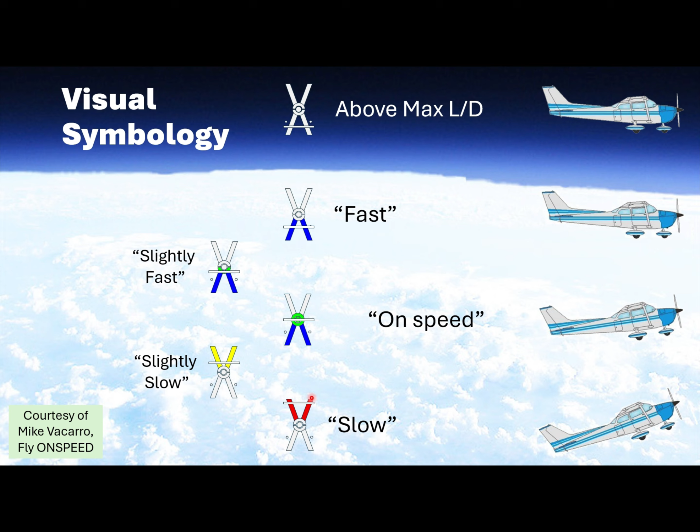All right, let's take a quick look at how the tone works. We'll just pull our power back, decelerate, and increase our angle of attack. Tone's going to start at an L over D max condition, which is a peak performance parameter.

400 hertz tone with a variable pulse rate. As I decelerate, the pulse rate increases, telling me I'm increasing my angle of attack. Once I get to an on-speed condition, the tone goes steady.

On-speed in this airplane is a plus or minus 1 degree AOA band, which works out to an airspeed band of about plus or minus 2 knots of an actual on-speed condition at 1G. Now if we continue to increase angle of attack and slow down, we get a distinct frequency change in the tone, and the pulses start again, giving trend information as we decelerate into the stall.

Once we get to a stall warning, we get a very distinct 20 pulse per second tone that's designed to mimic the sound of a stick shaker or pedal shaker, providing our normal FAR 23 stall warning criteria.

Now, this sequence is not flown by Mike. It's a different pilot that has an AOA system. It's got the same visual indicator up here, but this one doesn't have the inset in the video. What this is showing is how the audio indication of the AOA system sounds during a well-executed normal approach.

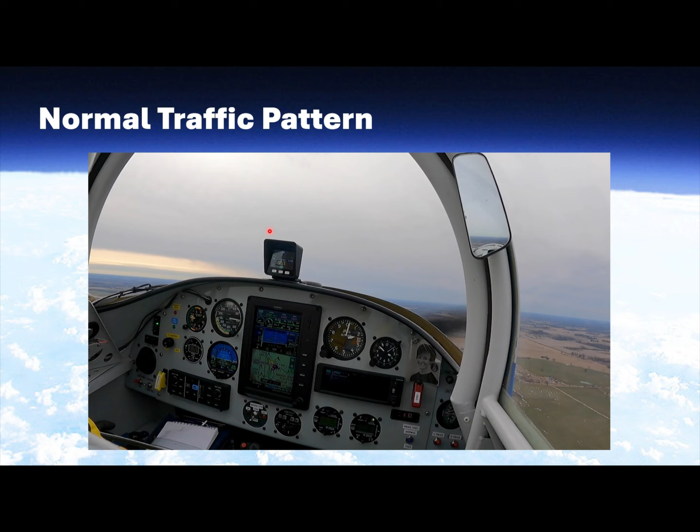During the approach, you should fly it at VREF, or on speed, meaning the tone you'll hear is steady throughout the approach. Then as the pilot starts to flare, you'll hear the indications that he's approaching stall. I apologize in advance, this is a pretty boring video because all you're hearing is a steady tone. He starts this sequence just before turning downwind to base leg, and it ends with touchdown. So let's hear what that sounds like.

Base traffic, 8 Tango Lima is turning base, full stop runway 10.

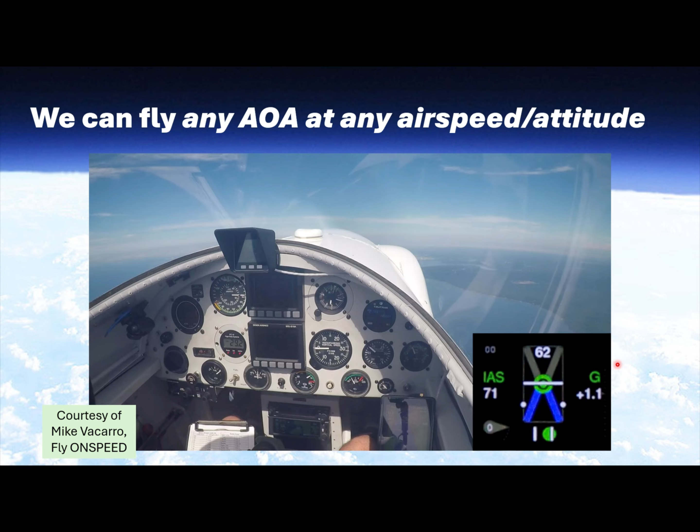Now, I mentioned earlier that angle of attack has nothing to do with the particular attitude or airspeed you're at. To demonstrate this, what Mike is showing in this clip is he's actually performing a split S maneuver where both the airspeed and the attitude of the airplane are changing radically, but he's intentionally flying this at a constant angle of attack.

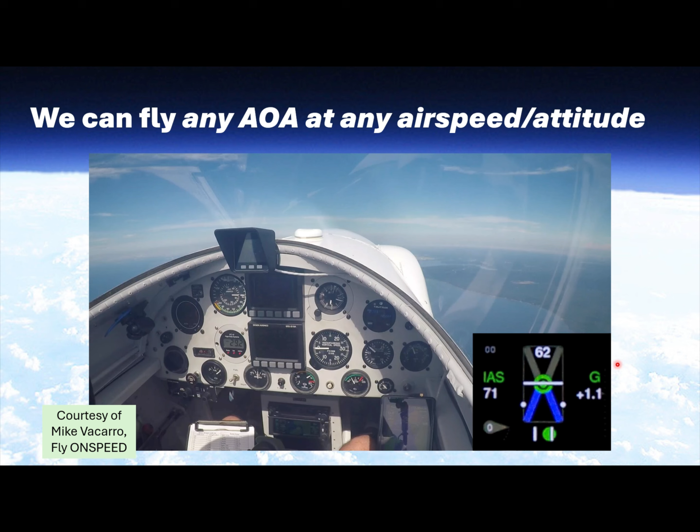He happened to choose to fly it at on speed. There's nothing special about flying a split S at on speed specifically; he's just showing you can maintain a given angle of attack regardless of what the airspeed and attitude of the aircraft are. So let's take a look at that in this video clip.

But before we do that, I want to talk a little about what an on-speed condition is. Remember, on-speed is an angle of attack, not an airspeed, okay? We can be on speed at any airspeed and any attitude. Right now I'm just at straight and level flight, at a VREF condition, and that, in fact, is on speed. But I can also maneuver on speed.

I can split S on speed. So obviously my airspeed is changing dramatically, but I'm flying the same angle of attack throughout the maneuver.

What Mike is doing in this next video clip is simulating a base to final turn. Even though the G's he's experiencing during this turn are pretty small, you'll see that he actually stalls the aircraft with a very small increase in G load. You can see the airspeed indicator here, which you've probably noticed before. One thing you may have seen is that the visual indicator also includes a G level recording or output, and you'll notice that when he stalls, he's only at 1.2 Gs.

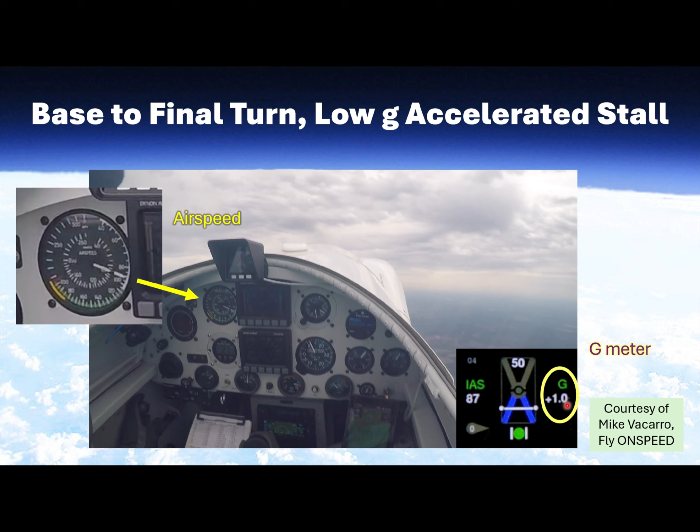So let's take a look at that video clip. Let's just set up for a common traffic pattern, and slow the airplane down. We'll deploy flaps 40 because that's the way we land this airplane. We'll go to an on-speed condition because that's the way we land the airplane, okay? And then we'll just roll into a base turn and we'll depart the airplane.

As you can see, there's very little buffeting, attitude variation, or airspeed variation that would let you know you're about to enter a stall. However, in the audio tone, you can hear that angle of attack tone telling you, hey, you're getting close to stall. That audio information should enable you to recognize that you're getting close to stall and act accordingly.

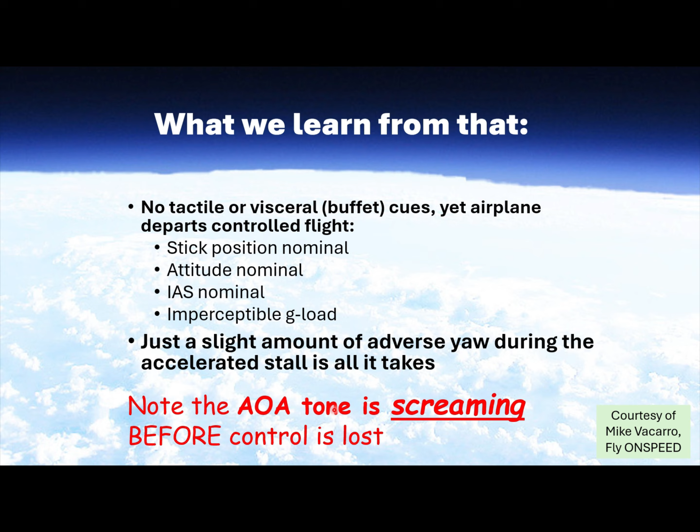This is the last video clip, and this is a maneuver that I would certainly not recommend people try to simulate. Obviously, Mike is a good pilot. He is an airline pilot. He was a Navy fighter instructor pilot. So part of the reason he's able to pull off this maneuver is because of his piloting skill.

However, the other part of it is that he's using the angle of attack meter to do the impossible turn as efficiently as possible. It turns out that you can get the best turning performance, no matter what your power level is, by flying at the on-speed condition. In fact, fighter pilots use it because it allows them to optimize their turning performance when they need it, such as in a dogfight. Dogfights don't happen really that much these days. But the point is that if you fly your turns at on-speed condition, you get the most efficient use of the energy that you have.

What I'm also showing you here is the altimeter of this airplane. The reason I'm showing it to you is that during the flight, the instrument panel is sort of in shadow, so it's difficult to see. The field elevation where Mike is operating here is about 250 feet. You'll barely see the altimeter shows that he cuts the power actually at 500 feet MSL, but then he counts to 3.

The reason he does that is to simulate what's called the startle factor. It typically takes a pilot about 3 seconds when some anomalous behavior occurs for them to recognize and start to react to that. So at 500 feet MSL, he'll start to count out 1 Mississippi, 2 Mississippi, 3 Mississippi, and by the time he finishes that count, he's actually right here at 550 feet.

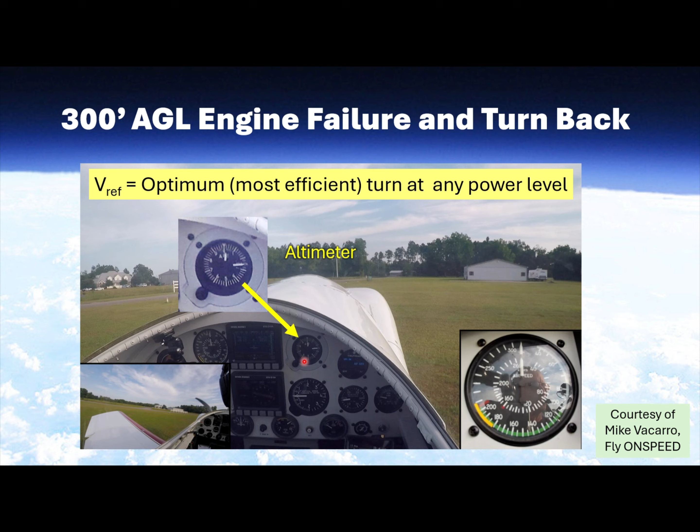So he's doing the impossible turn from a start that's 300 feet over the ground, and let's see what that looks like.

Skypark traffic, RV-7 Bravo, departing runway 9er, simulated engine failure on takeoff, immediate return 27, Skypark.

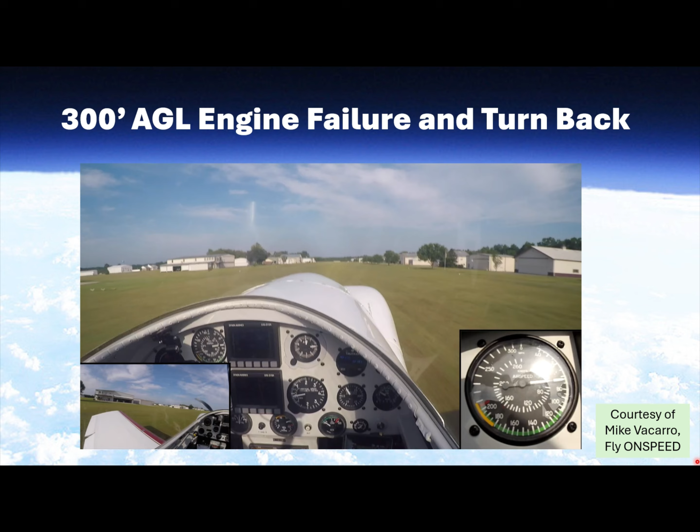So again, not a maneuver I would recommend, but what I'm hoping to illustrate with this clip is the fact that you can have the aircraft perform at its optimum performance level by relying upon the information that an angle of attack indicator gives you.

So let's summarize. First of all, loss of control is a significant contributor to general aviation accidents. AOA information can help you avoid getting into a loss of control scenario. And AOA is also very helpful for other flight conditions that occasionally we want to operate at.

The FAA understands this. It's their official policy for about a year now to encourage pilots and aircraft owners to install and use AOA systems. And there are a lot of companies out there that sell good AOA systems that are affordable and accurate. So my main goal in presenting this is to plant a thought in your mind that says, hey, is it worthwhile for us to think about putting an AOA indicator in our aircraft?

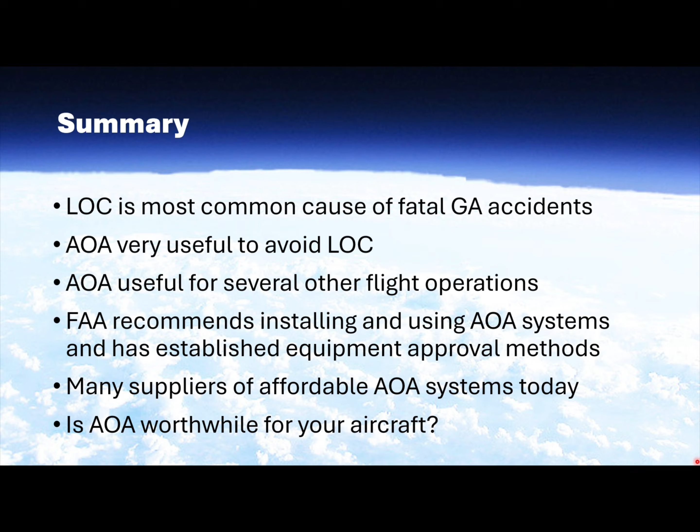I do want to acknowledge the contributions from an organization called Fly ONSPEED that Mike Vacarro heads. It's a nonprofit, all-volunteer group. All of their work is open source, and so what they're trying to do is enable the experimental aircraft community to build their own AOA system.

Initially it was focused towards RV builders, but it's broader than that. And because these are supplemental systems, they don't need to be qualified by the FAA, and it's certainly something that can be considered for certified aircraft, although there are many commercial FAA, I'll use the word certified in quotes, systems available.

So Mike is the sort of prophet of AOA, and I'm simply helping him to expand his reach in terms of the importance of AOA to the general aviation community. And so with that, I am happy to answer any questions you guys might have.